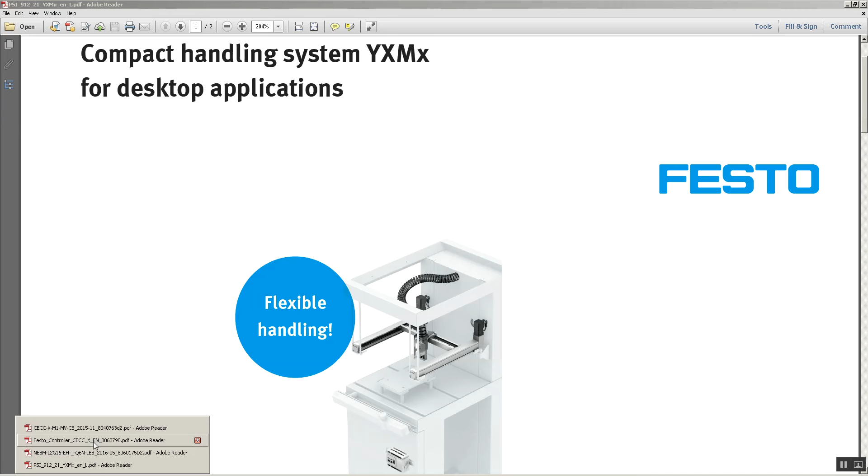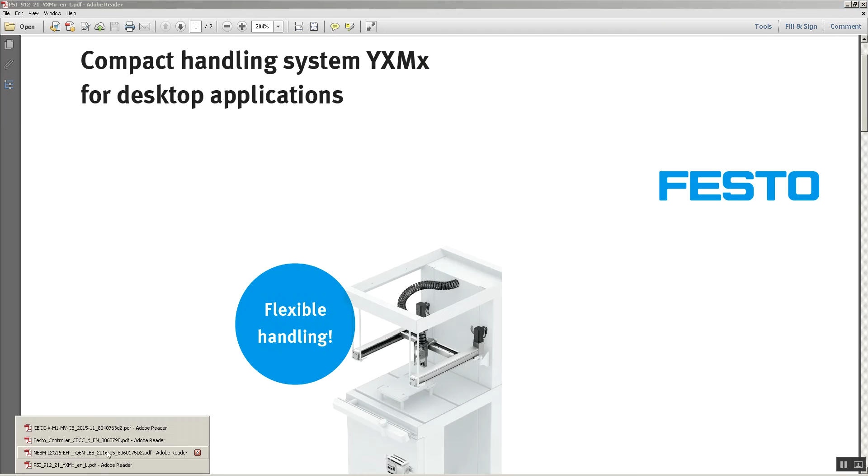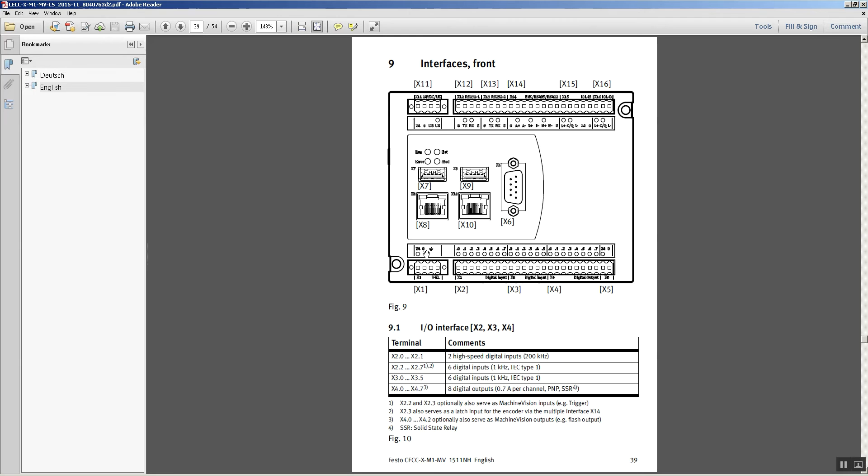First of all, once you get these, you're gonna get the controller like the one over here, that's in the scope of delivery. So first of all, we have to take care of the power supply, of course. Let me see if there's a picture here. So we have to supply power to this connector over here, and also this one over here, X21. So we will have to put power on X1 and X21.

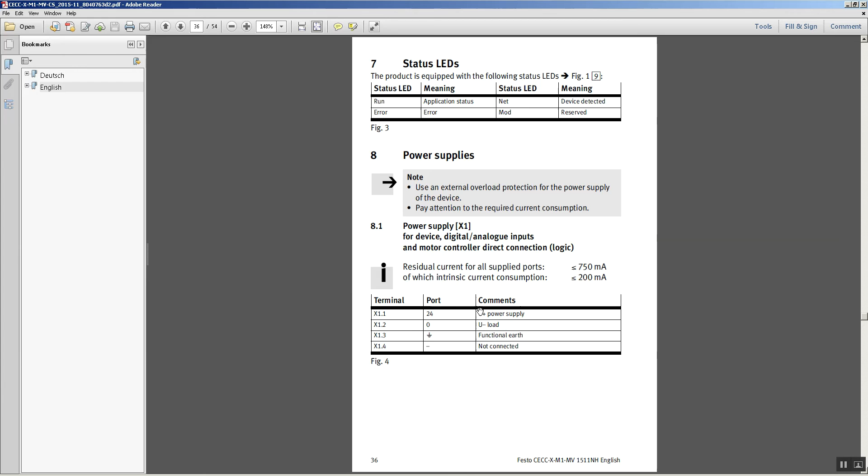I'll show you right here on page 36. There's each configuration of the terminal, the pinout. So 24 on X1.1, X1.2, X1.3 ground, and then the X21 connector. The X1 is for the device in general, but the X21 is the load voltage supply for the actual motor controller. So 24 or 48, depending on what you need. 21.1 and ground 21.2.

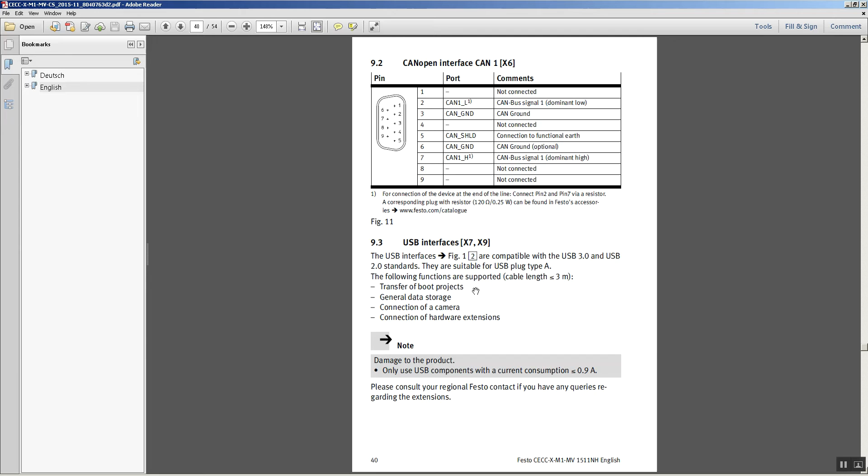Once you have that, you'll receive two cables which will be connected to these two ports, drive A and drive B. That's X-axis and Y-axis. And for how we connect this, there's a pinout for the cable, which is this one. The side on the left is the connector that goes to the motor, and the side on the right is the connector that goes into the PLC.

There's something that I want to emphasize here. It looks pretty straightforward. A1 white, so A1 is 24. Here, in this case for the first one, X22.1 is 24, X22.2 is ground, 24 for logic at 22.3, 22.4 ground. But this is the one that we have to pay attention to.

Because I can't make notes here. Well, anyways, let me see if I can at least.

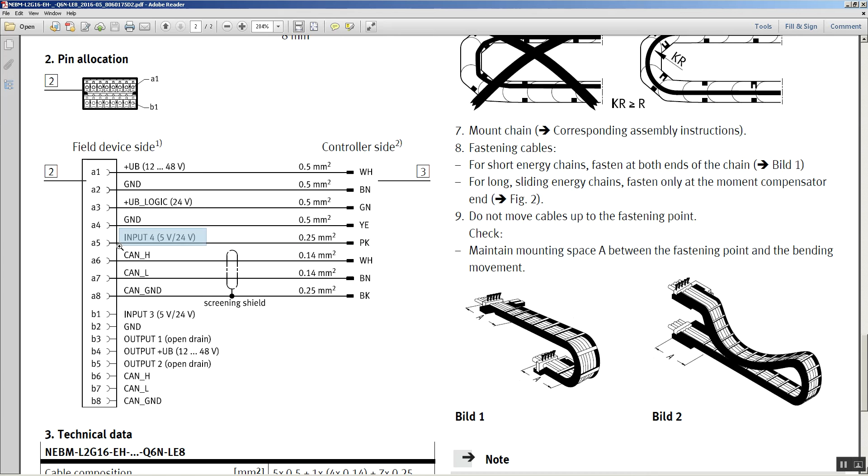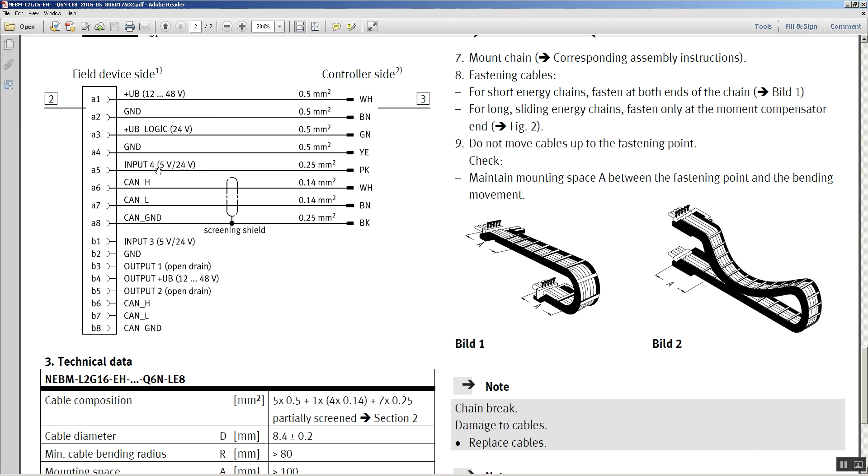No. All right, this one over here is the one that we have to pay attention to. I'm not gonna need it right now, because this is just an input, and I don't need it for commissioning. So I'm gonna leave that out. I'm not gonna connect that, which is A5 on the connector. That cable comes already pre-assembled. On one end, the connector is already there, and on this end you have flying leads. So leave that on the connector, but on the flying lead you're not gonna connect it.

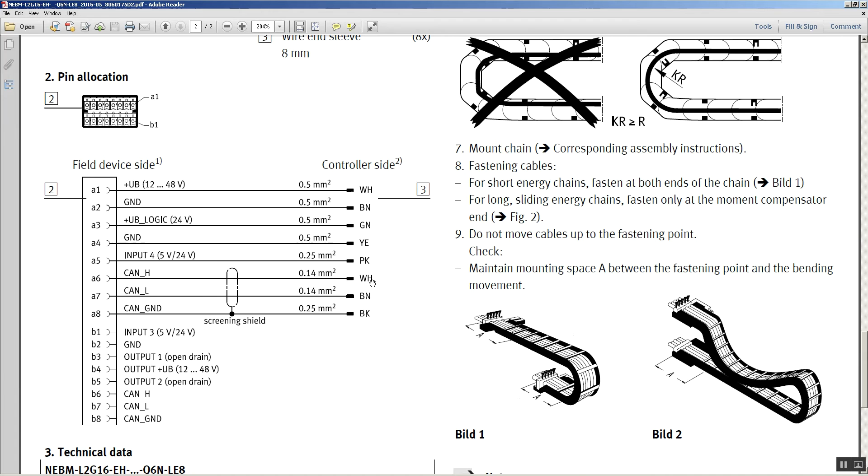But pin H, the white cable, you're gonna connect it, and pay attention here, because here it's position number 6, but on the other side it's position number 5. So be careful about that, because you can make the mistake of connecting the pink cable into 5. It shouldn't be like that. It should be white into 5, then 6 brown, and 7 black. Okay. And you should be ready to go.

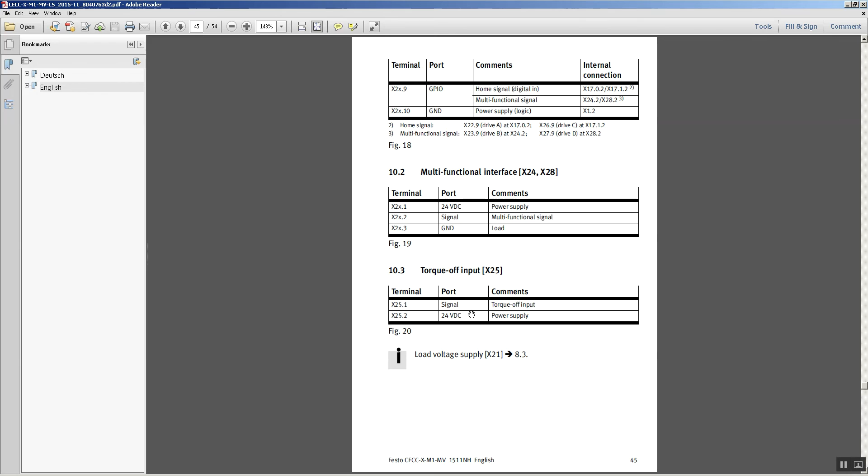Oh, sorry, I'm missing this one. I already said this has to be power supply 24 and 0, and on X25 you have to put 24 volts on X25.1, which is the torque off input. You can connect this together, because X25.2 is a power supply, so connect it to X25.1 and you'll be good. When you actually put this equipment in the machine, on X25.1 you will put the emergency stop or any safety component you need for the torque off input. And that's everything you need to start using the XY system.

So let's go to Codesys. This is Codesys, I just opened it. I already downloaded it, but I wanted to show you: from Festo.us support downloads, I'm gonna look up YXMx, which is the name of the controller. There's a program already done called Festo Positioning Basic Library. Just download that zip file, and then we're gonna open it in Codesys. So I'll go to my folder and delete the one I used to have.

So I'll delete this entire folder, and I'll keep the zip file. I'll extract it again. There. Okay. So within that zip file, this is the first one, the YXMx is the one that we're gonna use. So I'm gonna call that over here. So I'll go temp, then YXMx, and then I tell it to extract it into the same folder. Right. It'll take half a minute there extracting the whole project.

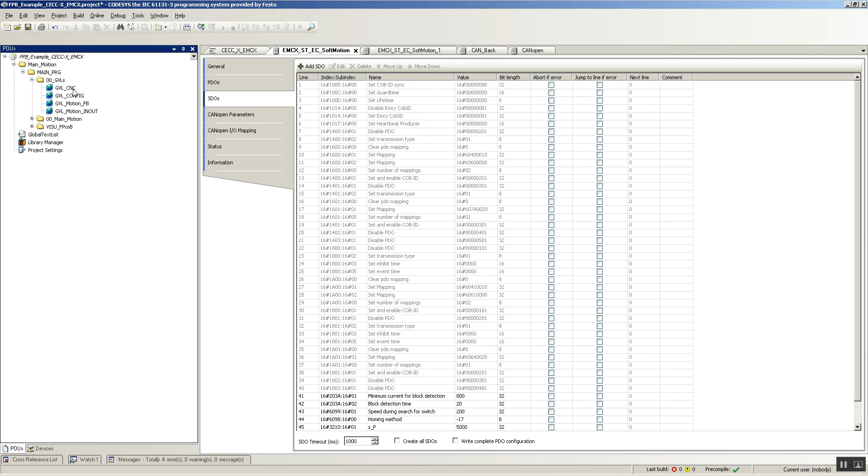So now I have to configure my program to what I have on the hardware. So I go into this global variable list, which is called GVL_Config, and here I'm gonna tell the program which axes are available: X, Y, Z, and so on. Right now I'm just using X and Y, so I'm gonna make the Z axis 0, and then here you can specify which controller type you're using.

In this case, this is the integrated motor that comes with the YXMx, but you could also have CMMP, CMMS, EMCA, etc. I'm gonna leave that like that. So X and Y again are the same. These don't matter to me because I have them disabled. The motor mounting that I have is bottom, so I'm gonna make that bottom for both X and Y. E bottom. Okay.

Not gonna be using that axis, but it doesn't matter because I disable it on the CAN configuration on the CANopen Manager. I don't have to change anything here. That's fine right now. Okay, that's fine too. Okay, homing order.

I'm gonna change this to 1, 1, 0, 0, 0, 0. And what this means is if I had different axes, usually you want the first axis to move on a 3D gantry. You want the Z to retract, right? So if I had 3 axes, I would first retract the Z axis and then home the X and Y.

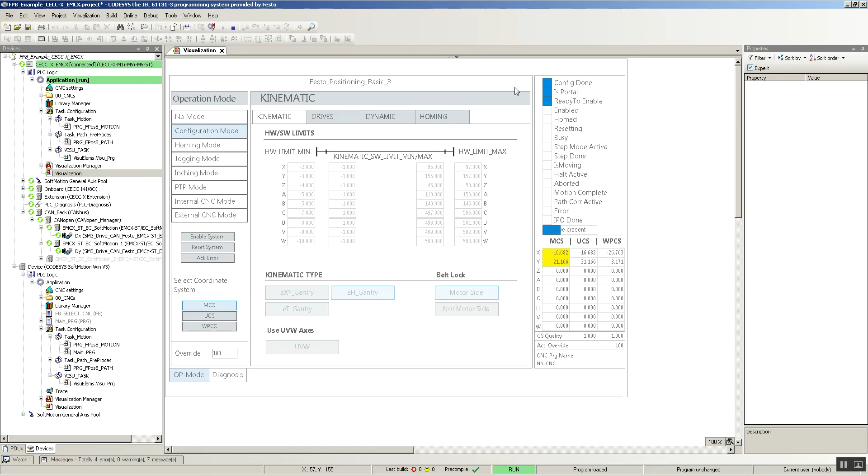I'm gonna close everything and I'm just gonna open the visualization over here. So first of all, I'm gonna try and home it and see if that works. So here it says that there's a portal, it's ready to enable. Okay, yeah, it's enabled, so I have that feedback there. Now let's see if it homes. Yes. Okay, it homed, so I can remove this bit here.

All right, so we got movement, and then I go to the jogging mode, and we can see that I can move. I'm watching the hardware physically, and it is moving. Then move on X, and I could also move point to point. So let's say move to 40 on X and 35 on Y. Start, moves. Okay, so point to point is working. And let's bring it back to home. It's moving, it's busy, homed. Alright, so that's ready.

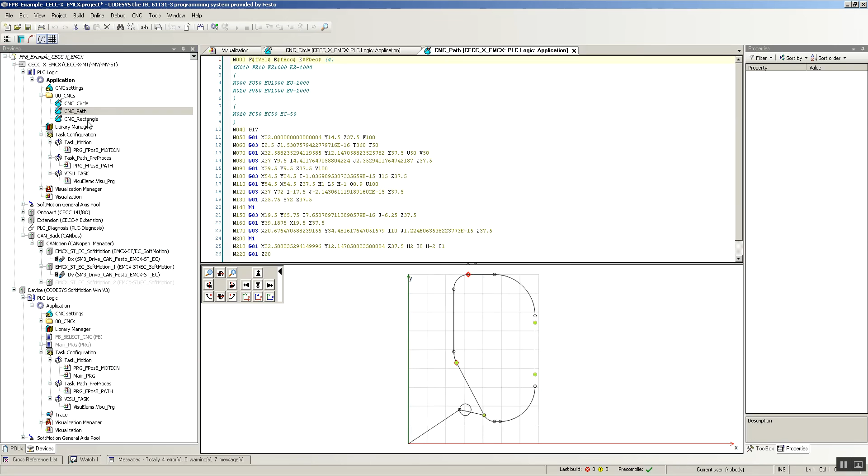What's next is I'm going to make a new CNC program, and you'll see that you already have some CNC example programs here. But I'm going to create another program and import a DXF file. It's pretty similar to this rectangle, but the other way around. So let's create a new CNC program, and I'll call this My CNC. And this is going to be compile mode SMC CNC ref.

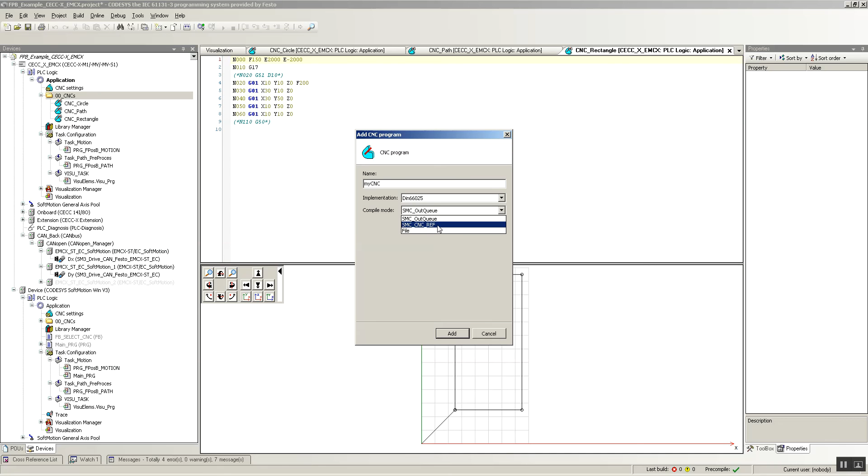Okay, add, and then double click on here, I get this option CNC import from DXF file, and I know that I have a file on my temporary folder which is called path, and that's a DXF file. So that's my rectangle there. I import that. Okay, so I have the G code now generated by Codesys, and what I'm gonna do is copy the speed from another program like this one.

So these are the parameters for the speed, acceleration, deceleration. And now, to rearrange the lines, because these two are the same number, I'm just gonna hit this icon here, and it rearranges the lines.

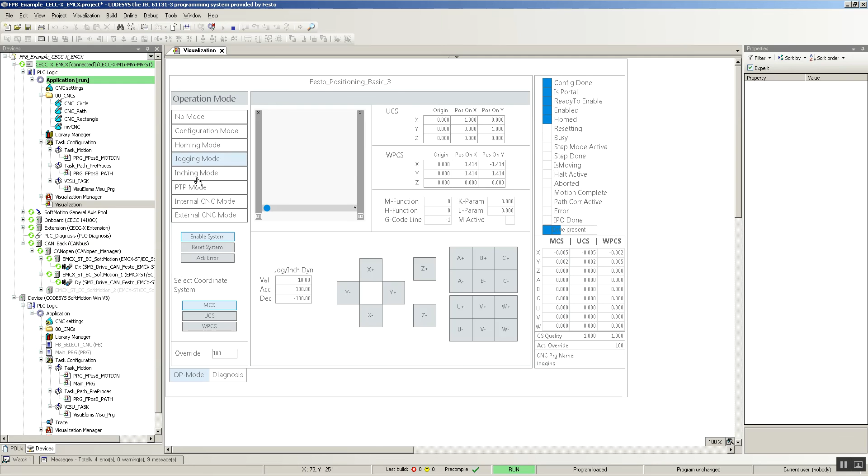I go to the visualization here. Oh, wait, I had it open, close all editors. Okay, here we go. I need to home again because I downloaded everything. It's homing. Okay, homed. And then internal CNC mode. Once I put here number 4, which is program number 4, I get the program name here. So my CNC. If I change to 1, it should be CNC circle, I think.

Oh no, it's path, but it is path because under these global variables, that's how the order is. So I'll put the number 4 again, which is my program. Now I'm gonna execute and watch the hardware, but you should be able to see some movement here on the visualization as well.

So start. It's moving. Okay, finished. And it gives me here motion complete and IPO done. And I can start that again. And you'll see it's moving and it's busy, right? Okay, so this is working too. All right, so now let's add the EthernetIP configuration.

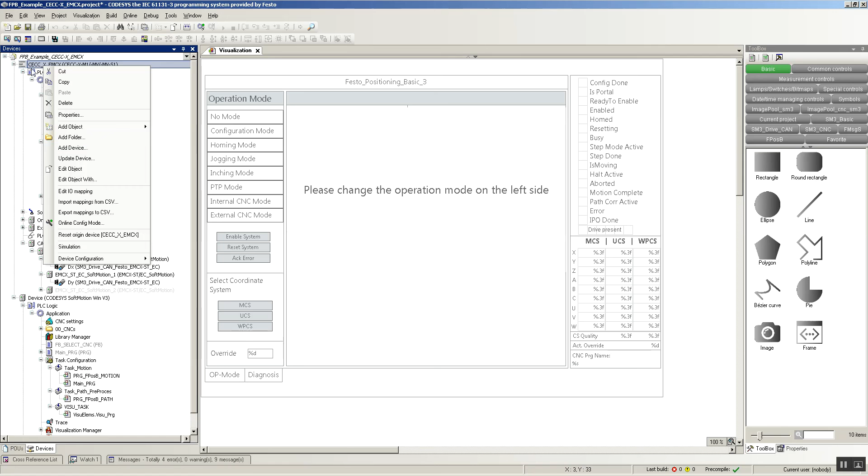So for the EthernetIP, we right click here, add device, and I'm gonna add a fieldbus EthernetIP adapter here. And then under this Ethernet adapter, I'm gonna add an EthernetIP adapter. Okay, close. And then, do I have to do something on the first one, on the Ethernet?

Yes, I do. I need to select the interface, and the interface that we're gonna use is ETH0. I believe ETH1 is for the EtherCAT because you have 2 RJ45 ports there. So ETH0 is for EthernetIP. Click OK, and these values are automatically updated. I don't have to change anything here. EthernetIP adapter here, let me see if I have to change anything. No, I don't.

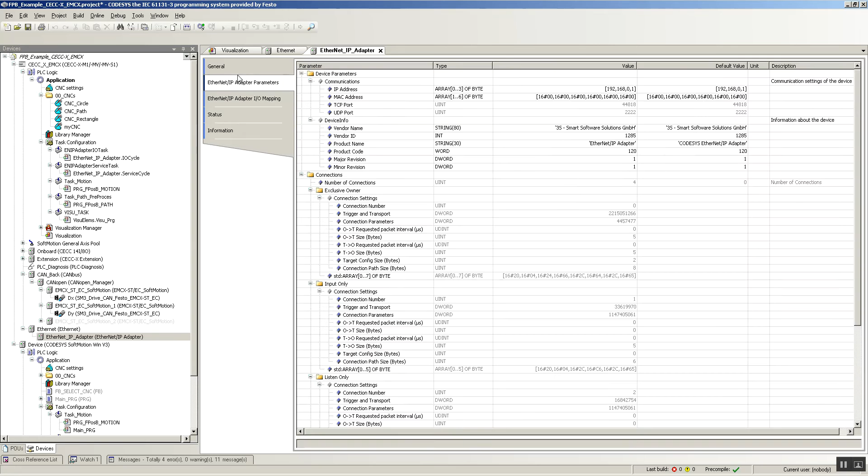All right, so add device, and I want to have inputs and outputs, so I'll add 2 modules, the first one and a second one. Okay, and the first module I'm gonna rename. Where's the rename here? Or I just double click here. Okay, EIP underscore in.

I'm not gonna adapt all references, no. And then I said, well, you can also do properties and then here EIP_out. All right, and now the in I have to change here to Word. So in this case, I want a Word input module, and I believe I don't have to change anything over here. But here I can see that I should have 16 bits there, a Word.

And then for the out, I need to change this to a Word output module and just confirm that you have your 16 output bits there. Okay, so now we can download again. It's not gonna ask me for online change because this is a big change. I'm gonna have to do a full download.

In the meanwhile that is done, I'm gonna show you on the Studio 5000 how to add this. In this case, I'm gonna add a generic module. I'm gonna delete this one that I had. Yes. So I'm gonna add a new module, and this is gonna be generic. See, Codesys must be done. I can hit F5 to start it, and this Ethernet configuration here should be green. Okay, green, and the CANopen is coming alive too. So generic, okay, generic Ethernet module.

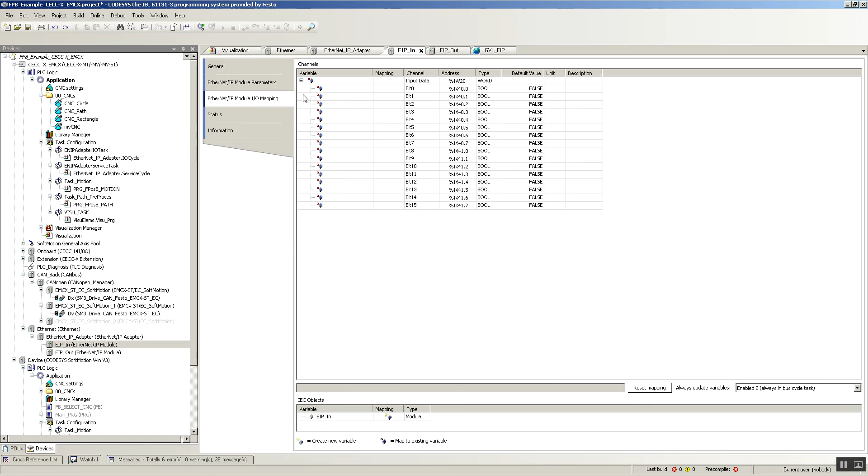Now let's create a variable to start that CNC, to execute that CNC motion. I'm gonna create another global variable list here, object GVL, and this is gonna be GVL_EthernetIP or EIP. And here I'm just gonna create a variable which is called global CNC start. And now this has to come from the input that's coming from our EtherNet/IP, right? So that input is %IX40.0. This is type BOOL.

Alright. Looks about right. And I'm just gonna put a comment here. This is start bit over Ethernet IP. Okay, so we have that start bit, and now we have to link it to the actual start that's in this program on Codesys. So I'm gonna create a new program just to not modify anything over here on these two programs. I'm just gonna create a new one.

I'm gonna say add object POU. This is gonna be EIP and structured text, add. Okay, but I need to add this to a task. Some task, it doesn't matter. In this case, the priority is too high for what I want to do, but I'm just going to put it here just for the sake of making an example. Main motion, main program, 0, and here's the EIP. Alright, so it's going to run that now.

I go into that program, and now I have to assign that variable, this one, GXCNC start. You got to assign that to a variable that is, let me try to remember. If I don't remember, let's look it up on the library manager. Here, documentations. Okay, let's open that up. And let's see here. It should be this. ST. No, wait. This one, PSTCW. Something like that.

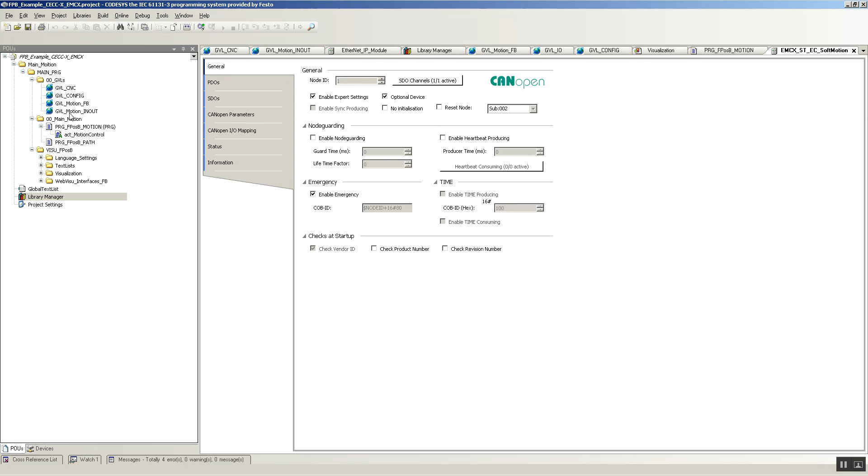Okay, here we created a variable, and then here it is. G_STN. Okay, I wasn't too far. G_STN dot. Okay, I see what happened. xStart. This is gonna be equal to the other variable that I created here in the global variables for EthernetIP. So whenever this variable is active or true, this variable is automatically gonna be catching the value from that one.

So let's download that. Let's do a full download. Okay, while that is downloading, I just want to make sure how I missed that variable. So what was the name of that again? G_STN. Okay, so it's GSTN right here, and then what? Oh, .STCW. STCW. So it's this one. Okay. Anyways, what is this doing?

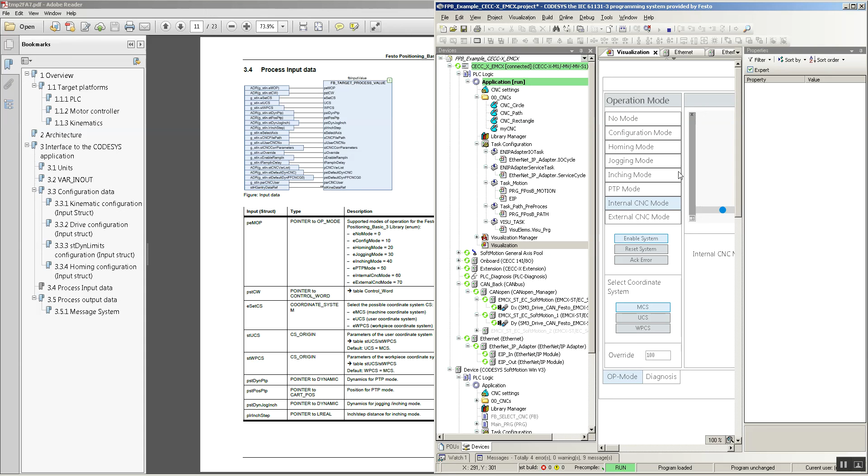Now I want to make sure that this is working, so what I'm gonna do is I'm gonna make this small, and I'm gonna show you here the output. So it's output, and we said that it was the first bit, right? So it should be this one. So if I hit start, I turn that to 1, enter, and we have a movement there over Ethernet IP, of course.

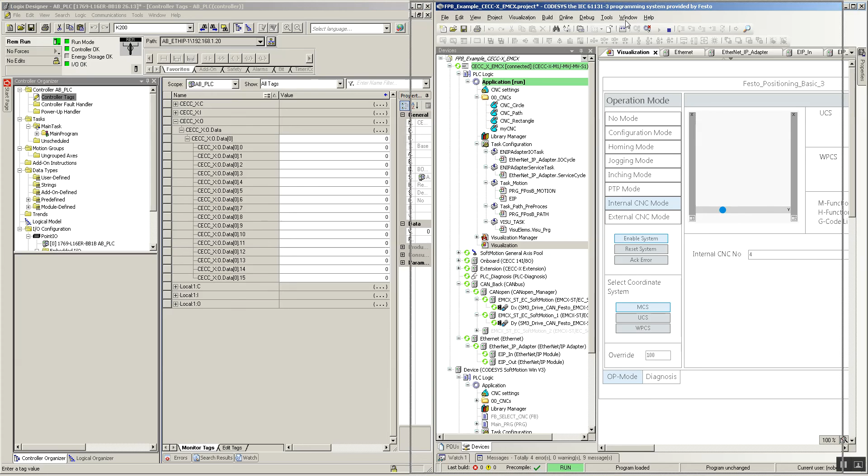Now, of course, you're gonna want to execute some other instructions, right? Like homing or jogging or whatever, or even change these programs. So if you want to look at each of those variables, like the one I was trying to find, you can look that up here under the library manager, and then Festo positioning basic documentations, and go into this PDF file. It's already open. This one. So here you can see.

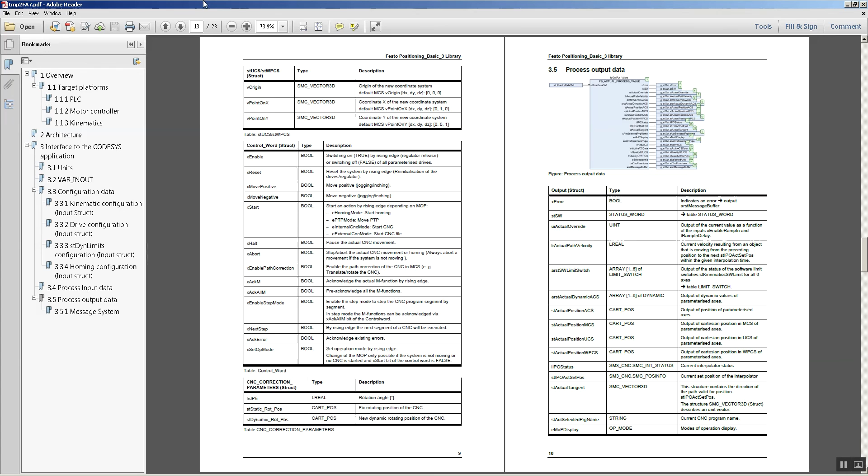So for example, the PSTCW, and then it takes me to start here, which is the one that I'm using right now. Start. So it starts an action by rising edge depending on MOP. So right now mode of operation is internal CNC mode, so it starts the CNC, right? But if it was in homing mode, for example, it will start a homing or move point to point, whatever. And you also have some other options here.

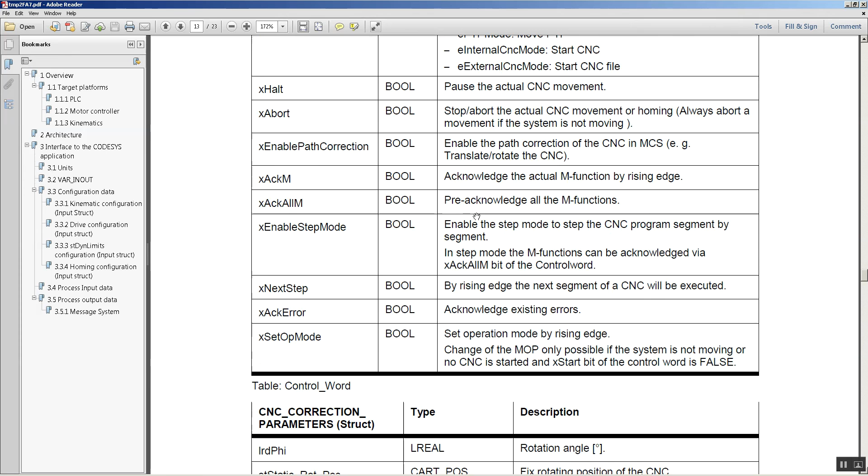So if I go to the next page, you have actual position. You can get also, let me see where that is, enabled, all the feedback like busy, is moving, etc. Right? So that was it. That was the example to show how to link Codesys and use it with Allen Bradley CompactLogix over Ethernet IP.